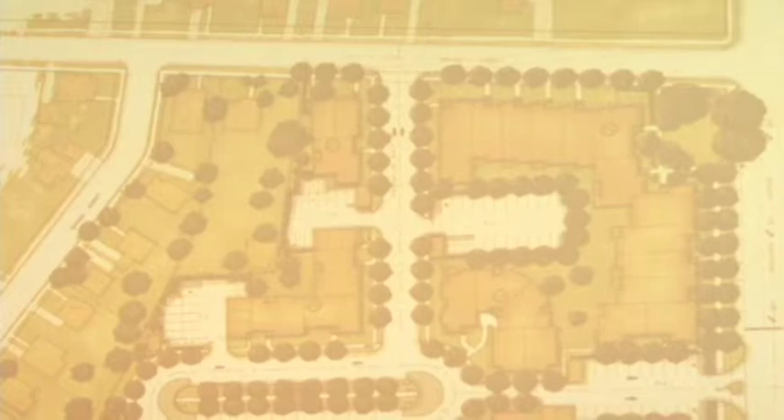So the first project I wanted to show you is in Metuchen. It was designed in the late 90s, constructed a few years later. It's about 2 blocks from the center of downtown Metuchen. It's a project of 2-story apartment buildings, once the site of an elementary school built about 100 years ago.

The school couldn't be saved or repurposed because it had extensive asbestos contamination, so it was slated for redevelopment by the borough. It was a project actually initiated by the borough of Metuchen.

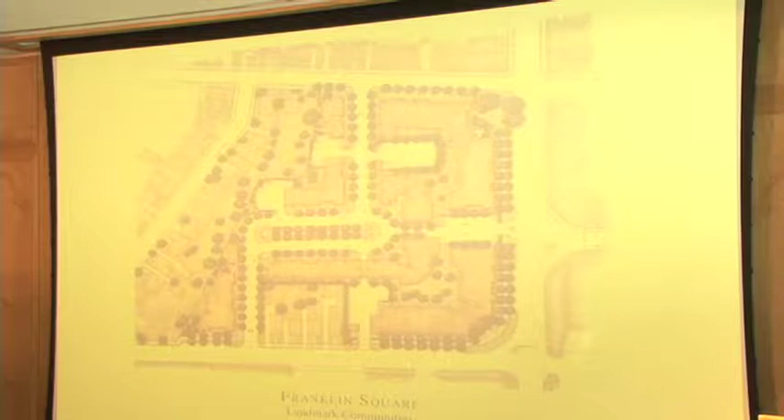Noteworthy for a couple of things at the outset: a very large site for an in-town redevelopment, almost a 6-acre site, 2 blocks from the center of town. It's also an affordable housing site, and one of the challenges was to include housing where the developer had an internal criteria that wanted the affordable housing to be completely invisible.

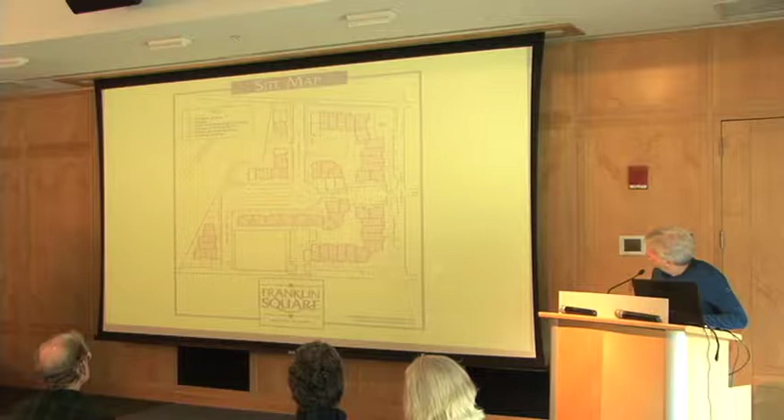So if you walk through the community, you couldn't tell what was affordable and what was market rate. And there's your cheat sheet - the lighter colored boxes are the affordable housing. So I'm going to walk through what this community looks like and then talk a bit about the parking issues.

A number of criteria were imposed on the project, some from the borough of Metuchen, which had very clear ideas about what it wanted to achieve, and a number internal to the developer. One was that both the developer and the borough wanted to get as much parking on-street as possible, in the form of on-street parallel parking, and to avoid the extensive use of parking lots.

Since inevitably you couldn't get all the parking on-street, where parking lots were needed, the idea was to disperse them around the community so there wouldn't be visual impact of large parking lots, and to minimize their impact on the public space. Where parking was going to occur in large concentrations, they tried to find ways to either mitigate it or re-reference it, so it didn't necessarily look like a large parking field.

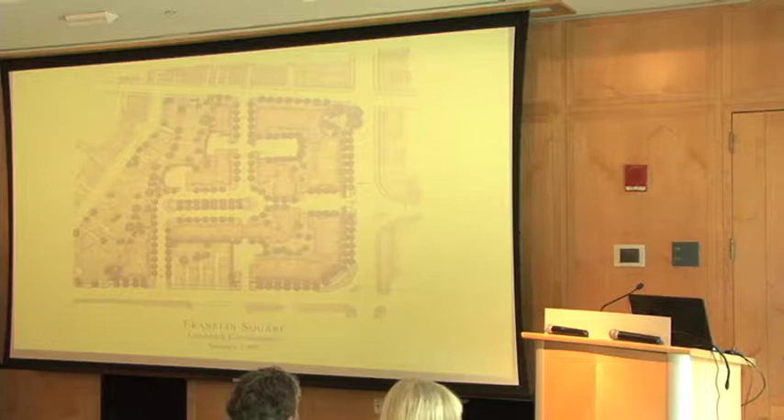Are these through streets, or do they have a termination? Let me back up and look at the site plan - I forget, I didn't check that on the picture. Keep an eye on curves and turns. So, okay, they could be through streets - yes, let me grab my little magic pointer. Yeah, so the streets all go through, but not in obvious direct ways.

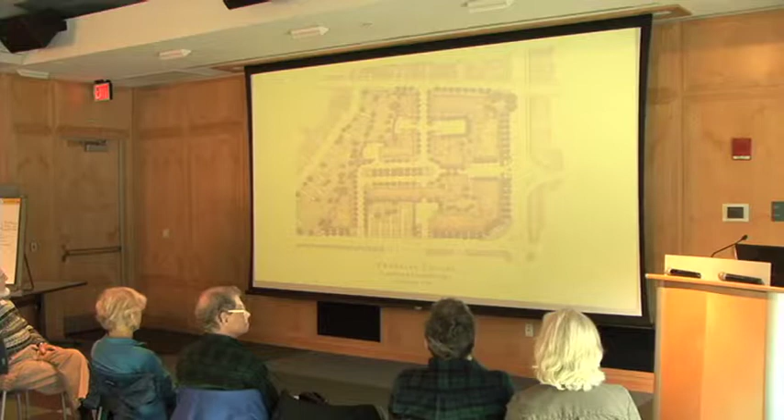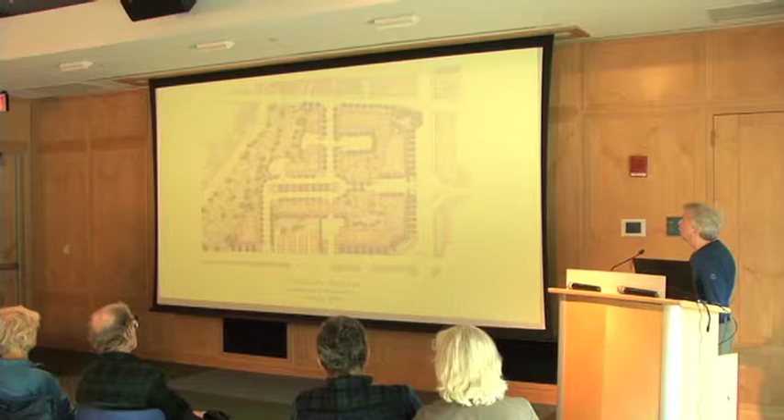The intention is to balance those two things - to have traffic that can go through, so you get the advantages of an urban grid where people can get from point A to point B, but they don't necessarily get there really fast. So this is Route 27, and this is a county road with huge amounts of traffic, 4 moving lanes. It's actually a lot busier than Route 27 is in Princeton, and that's a local street.

There's a traffic light here on the major road. So there's a temptation to cut through to avoid the traffic light? There's no temptation to do that, because it's pretty circuitous. You have to do all that different amount of stuff, and it's about the same amount of time to wait for the light. Most people driving through who don't know the community probably don't know those routes.

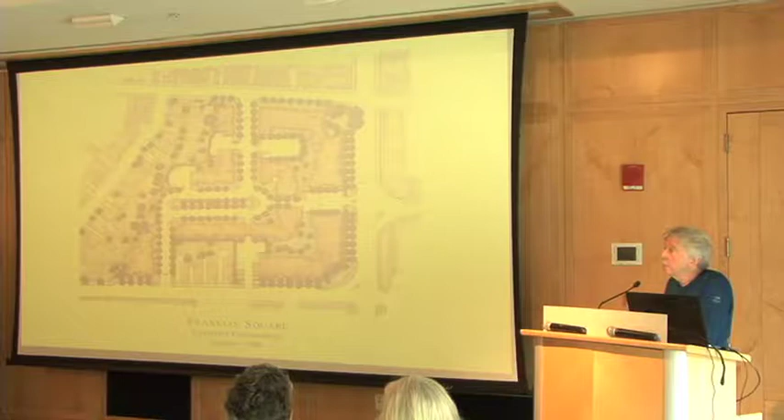Metuchen is sort of like Princeton in that the street layout is a grid, so if you know your way through town, you can navigate all sorts of ways. But the idea here was to create as much road frontage as possible, so every single street had parallel parking on both sides. The net result was about half the parking was on street and half in parking lots. Reducing the parking requirement serviced in lots to half meant you only needed 5 relatively small parking lots to accommodate the rest.

Another advantage is that the parking spaces on street are not designated, so virtually everyone who lives here can pretty much park in front of their house. You may not be able to park both cars in front of your house, but that seems to be a tremendous virtue. So it seems, in hindsight, remarkably obvious that this is a logical way to develop a site.

This, by the way, is the sort of development that will probably be happening in Princeton at the same distance from the epicenter of Princeton as this was in Metuchen. One of the things that strikes me about this site is that while this is a very busy commercial corridor and the train station is 2 blocks that way, these are like the tree streets in Princeton.

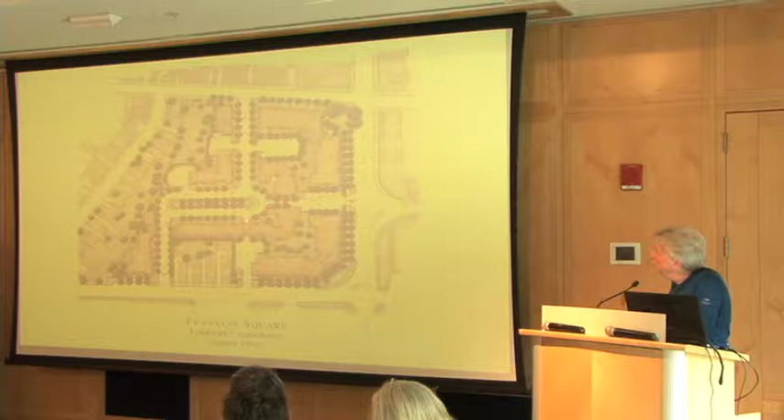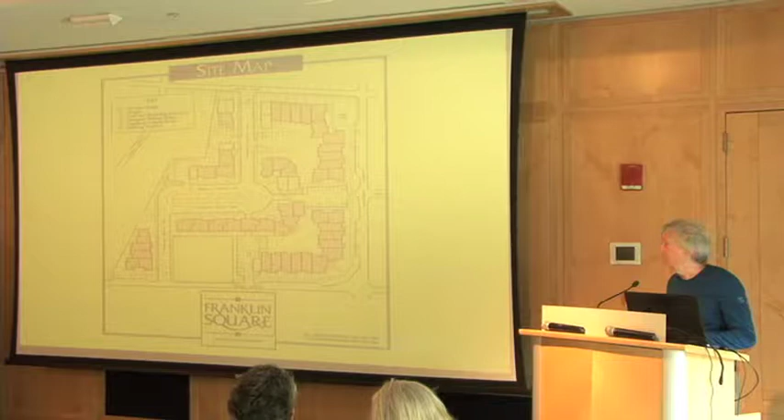For me, one of the niftiest takeaways is that space, which is basically a parking lot. It looks like a park, and it feels like a park, but it's actually a parking lot. This project was a great awakening for me because I realized I focused on the relationship between parking lots and streets, and for the first time I realized that's a parking lot: there's the curb, one lane, a 30-foot cartway, a 30-foot park, and another 30-foot cartway on the other side.

So it looks and feels like a park. That was the original design of that space: a 30-foot road, a 30-foot road, and a 30-foot strip of green in the middle. That's what it actually looked like. How would you compare that to the old hospital site?

It's similar in that it has the same proximity to the center of town, and a similar scale of housing type, but very different in terms of density. I suspect your question had a specific thought behind it? Yeah, just to know how you'd compare the differences between something like that and the hospital site as it would apply to Princeton, since we have some communities that have accomplished that in town.

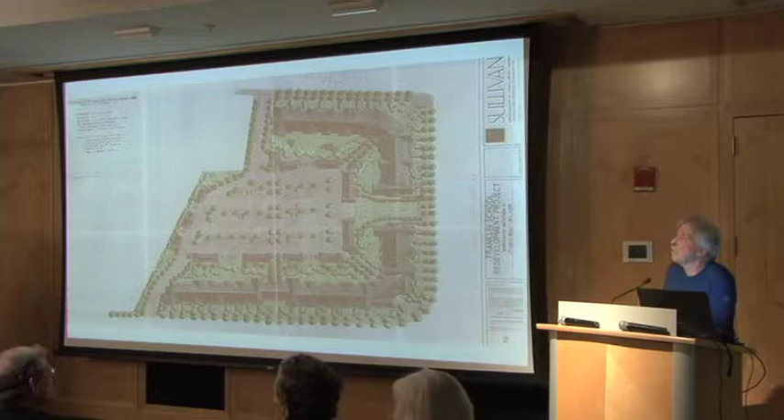Yes? Yeah, I think your design is beautiful, I think it's lovely. My question is, though, is there a 6-acre property that we're going to put it on in the borough of Princeton? I mean, I don't really understand.

We're not actually suggesting this project get built in Princeton. We're showing examples of how other communities could apply this, so it could happen on a 3-acre site, a 2-acre site. I'm just looking at the strategy of—this was the standard reigning idea of design—put an enormous parking lot in the back and line the edge with buildings. So we're not really suggesting this be directly applied to an existing site in Princeton.

So in other words, it's not going to be behind the Spring Street parking lot and the record exchange in that area? Correct.

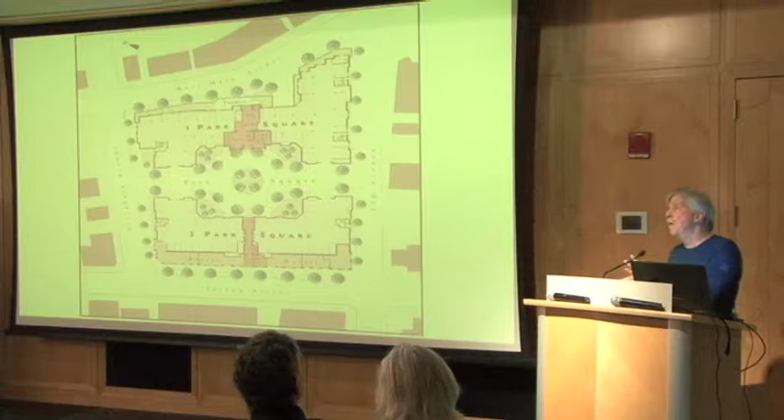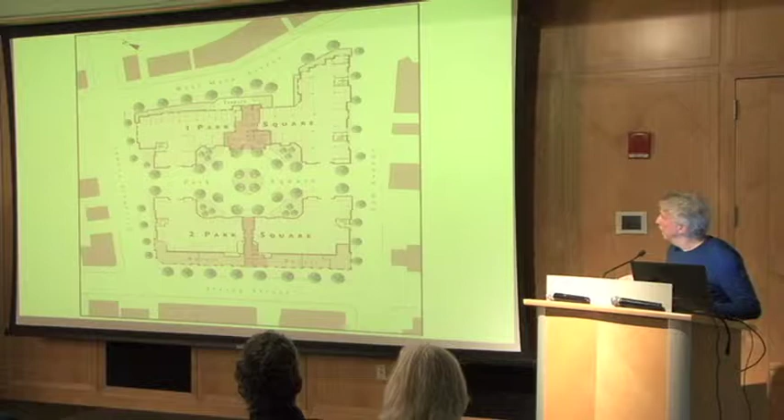It's an important determinant of building form for residential downtown projects. The parking lot and building typology works with a central hallway, the width of that hallway is 6 feet, and the depth of those apartments is approximately 30 feet. It's a very happy marriage. This is a great solution, but it makes huge demands on the design of the project because now you have to deal with a building that's 85 feet deep.

We made a decision early on, taking a leaf from the Metuchen project. We said, this block is so big, what are we going to do with the center of it? We could have left it as green space, but we felt there was a need to address the parking issues in a way that a new street in the center of the site would help. We weighed the value of a sealed-off green space, enjoyed only by residents, against the advantage of putting a street through the center of the block, breaking it into two. The wiser course seemed to be the latter.

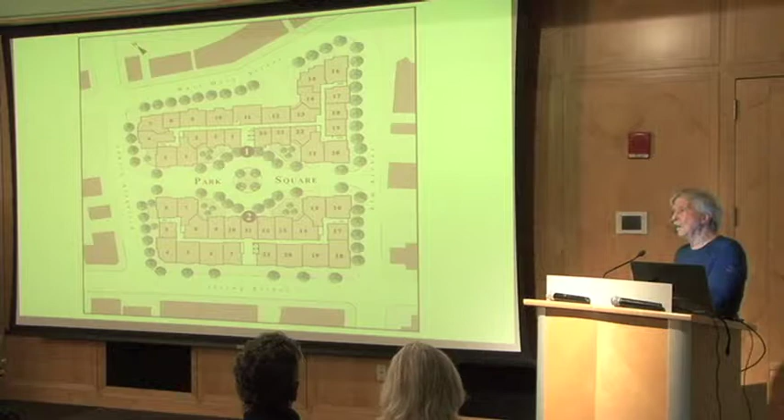One reason we did that is that when people show up to rent an apartment, the rental office is right there, so we wanted people to always be able to pull in, find a parking spot, come in, have their appointment, and rent their apartment. The advantages were that it made the cars happier, the prospective tenants happier, and pedestrians happier. We also found that through the design of that space, we could create social spaces of a type that did not previously exist in this area, or certainly in this type of housing.

So, back to walking around this community. One of the issues — earlier I said that in looking at a project like this, it's worthwhile to look at both what it looks and feels like today, what we can learn from that, and also what problems people were trying to solve at that time.

At that time, no one had built a project like this in Rahway. Before we came to Rahway, a housing study had been done by the city to see who was living in Rahway and why, and this ultimately relates to parking. Merck was started a 5-minute walk from this site by the nephew of the Merck founders from Germany, who sent him here in the mid-19th century to find a place to build a factory. They built that factory right near here. Though Merck has grown to something that looks more like Stanford than Rahway, the housing study found that over a 20-year period, virtually no one above the level of janitor who worked at Merck had moved into Rahway — the company was constantly cycling people in and out of that facility. No one chose to live in Rahway above the level of janitor for almost 20 years.

One of the things that said to us was, if we want to have people live in downtown Rahway, one of the questions we had to ask ourselves was: why would a single woman want to rent here? And what would make her say yes, and what would make her say no?

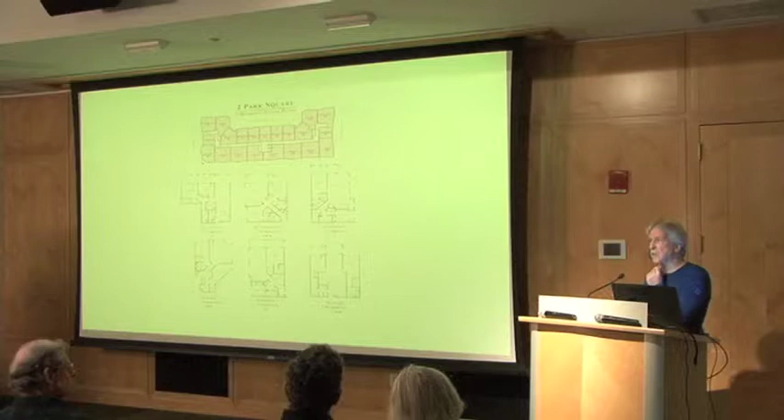One of the things that's interesting about both of these communities relates ultimately to parking in this sense: if you take the parking issue seriously, and you marry that to the inevitable issues of development and dollars and cents you have to deal with, you end up with a project in which the form and the site plan, the layout of roads and paths, and the footprints of buildings are all driven by parking considerations.

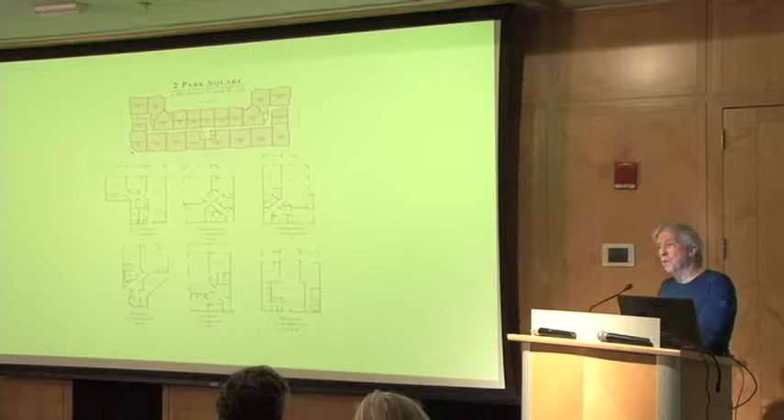Another consideration is quality of life, and then you face this dilemma: you lay out the buildings and the site in a way that shapes the buildings to promote good urban design, but then when you go to lay out apartments in those buildings, you find that those buildings don't really have terribly regular shapes.

The result is — these are pages from the brochure of Park Square — you can see that while there are nice rectilinear floor plans, there are many floor plans that are anything but.

Because of the exigencies of the site, we really followed the same guidance in both of these projects: urban design considerations were the card that trumped everything else. When it came time to design the housing, we said we'll just find ways to make the housing work. It's pretty easy to make a habitat where people will be comfortable living in almost any shape — the problem is how do you do it economically.

Inevitably, when you build apartments with shapes like this, in a project of this size with this many different footprints, it ends up costing somebody something. But at the end of it, this is ultimately a public policy decision, because shaping the building and the site for the advantage of the public is what municipal government and municipal decision-making is all about.

If there's a price to be paid by the private entity doing this project, well, sometimes the developers just want to do it because they think that's the right thing to do, and sometimes they want to do it because they think that's how they make the most money.

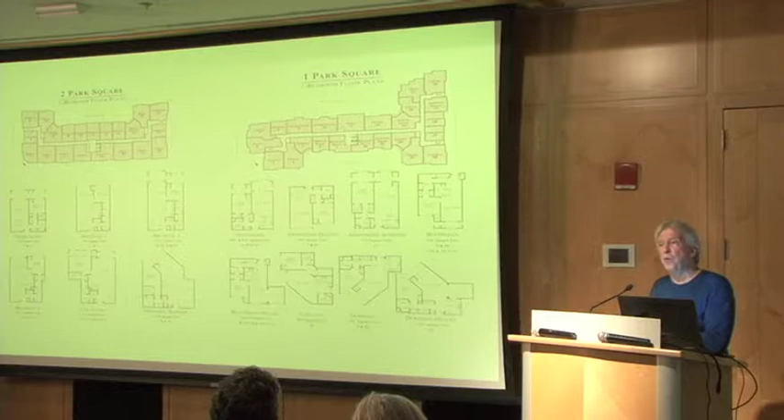Most developers do not think that. So if it turns out to be beneficial to the community to have a project with different shaped footprints of apartments, and the community believes in that, but the developer believes that's bad for his bottom line, then that's worth a conversation, where the public and private pieces say, how can we make you whole? Because we think doing that will lead to good things for our community.

Two other things, I'm sorry. Are you taking into consideration services like Lyft and Uber and driverless cars, that maybe you won't need parking at every house?

It's a very dynamic marketplace, and things change so fast. In 15 years, the dialogue even in Rahway has changed from, well, we're never going to rent an apartment if this garage isn't totally safe, to, wow, this person's not even going to have a car, they're going to walk everywhere.

So the answer is yes. The projects we're designing now take that into consideration. The projects going through approvals now, the municipality and planning board look at those and say, what can you do to reduce parking demand in return for your request to have less parking?

It's probably a good point to pause and say that in Rahway, at the time we did Park Square, no one knew what the parking should be. The city basically said, we're open to what you think will work, because we want this project to happen, since no one's built a project like this in our town. So they were very flexible.

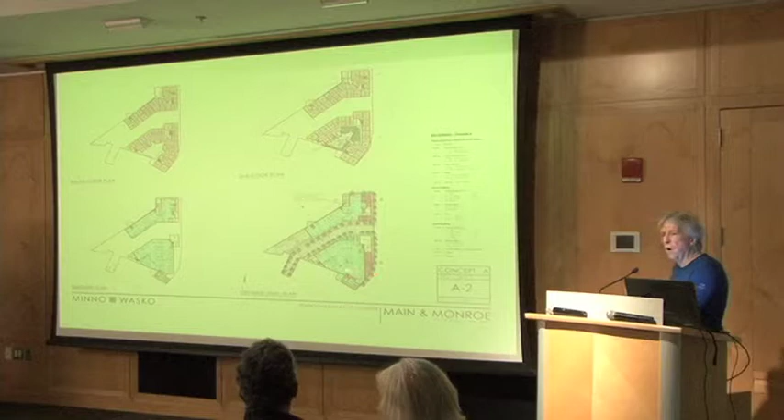The site, being close to the river, has a slight change in topography, and has the same program as Park Square. This is the plan at grade level - blue is the parking garage, pink is liner retail on Main Street. In this part of Rahway, Main Street is Main Street, so we didn't want the parking garage to be visible.

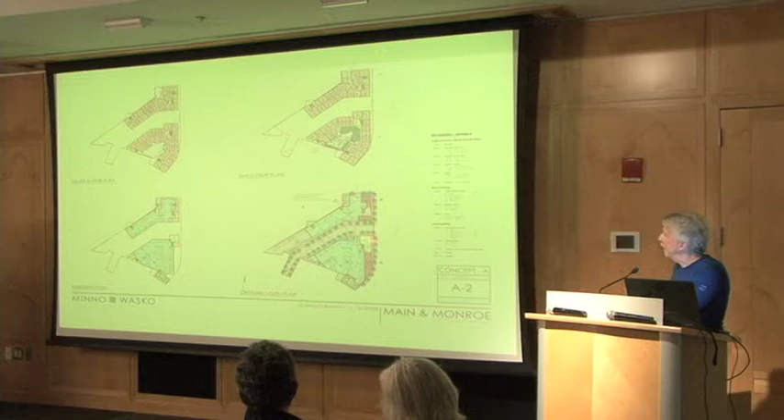This site is a block away from that - this is Park Square. This is the site I just showed you, on Monroe Street, which used to cross the river and end in a T at Main Street. The project I showed you a moment ago is called Main and Monroe.

In that project, we ran the street through to create new frontage, increase walkability, and accomplish something else - none of the projects I've worked on have anyone living with a view of a parking lot or dumpsters. In these situations, it seemed right to me to bisect blocks that were too large - that's a value judgment, but in my view they were unnecessarily large for what was socially desirable, and the result is more frontage.

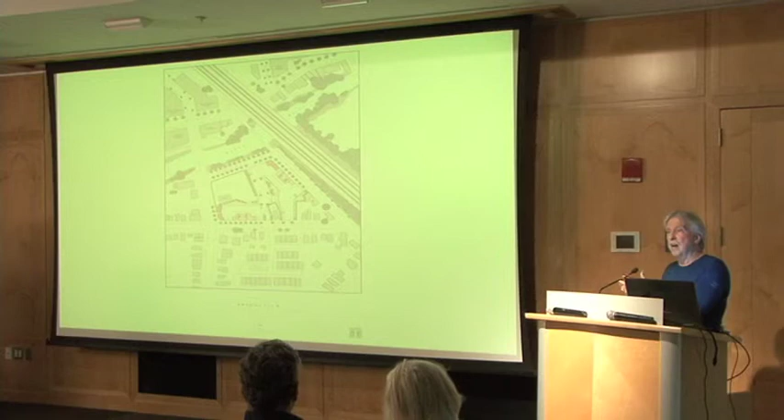So everyone walking along those new sites, whether Park Square or Main and Monroe, is always seeing the front of a building, and if you live there, your view is always a street. My personal ideal for a street is like the streets here in Princeton or in Metuchen - everyone living there has a heightened experience of public space, with great attention paid to detail on those streets, increasing quality of life for people inside and outside the buildings.

This site, adjacent to the Rahway River, has a developable area of 2 acres out of a 3-acre block.

Is this all rental development we're talking about? Yes, it is. So there's no chance for people to come in with condos or townhouses, young people starting to buy? The market most supportive of young people today is rental, because they can't afford anything else. The economics of ownership housing like condominiums here makes the price points very difficult for young people to afford. There are townhouse projects in Rahway, but they tend not to attract starter-level, entry-level housing.

But Robbinsville is a perfect example of how townhouses and condos for young and old can be very popular and successful. Well, one issue is that Robbinsville isn't really a town center, though it markets itself as one. In places like Rahway and downtown Princeton, land is at such a high premium that there isn't room for townhouse development unless you're willing to trade off having a whole lot less housing units. For places like Rahway, and I think central Princeton too, the more important value is getting more people living in the center of town.